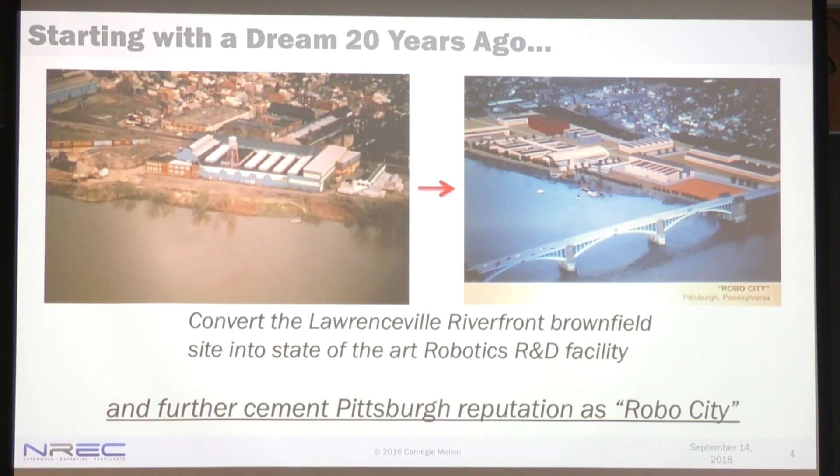So we built the building - that's what it looked like back then. We tore down most of the shell and kept the structure, basically. Now it's a very nice facility.

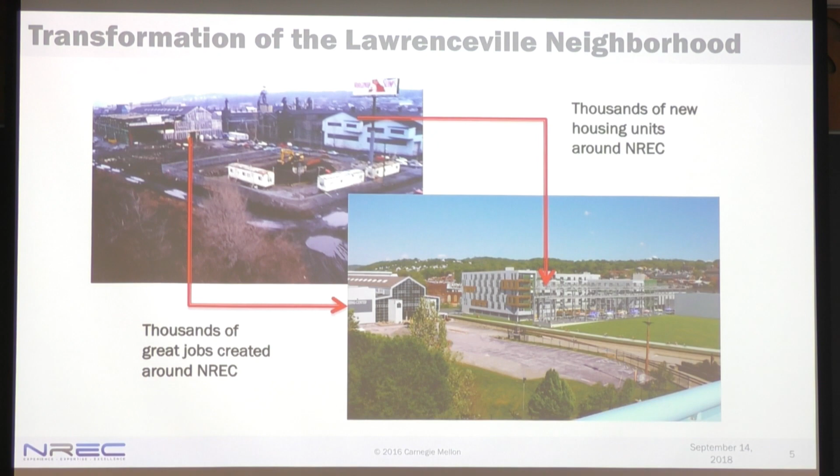One thing we are proud of - we're not saying this all happened because of us only, but certainly we played a critical role - Lawrenceville is now becoming one of the most desirable places to live in the whole city of Pittsburgh. There's a lot of nice property there, and part of this is because many high-tech companies started up around our facility. Once we were there, people started building other facilities, companies moved in, and as companies moved in there were a lot of great jobs. People needed a place to live, so they started building apartments and condos too. Now the whole neighborhood is transformed, and we are very happy to play a role in that.

Right now what is happening is what I like to call the robotics triangle. With NREC here on the north edge of the triangle, Carnegie Mellon on the southeast, and downtown on the southwest, there are so many different high-tech companies, not just robotics, including startups from CMU and other universities. There's a huge concentration here in this triangle, and we are happy to be part of this.

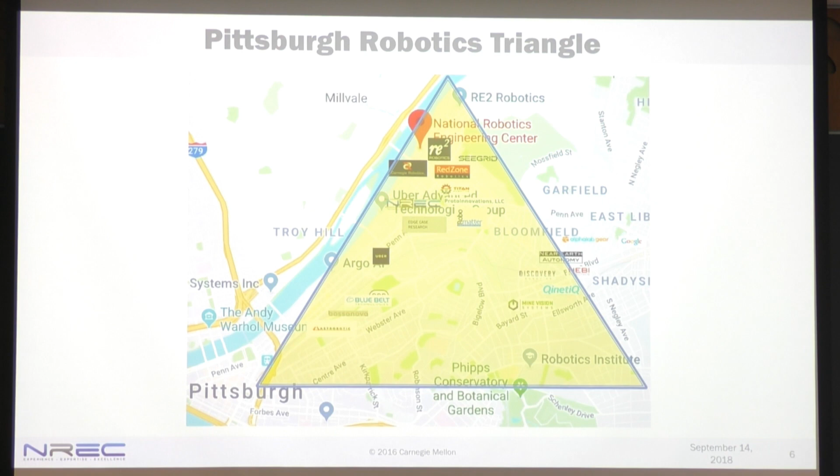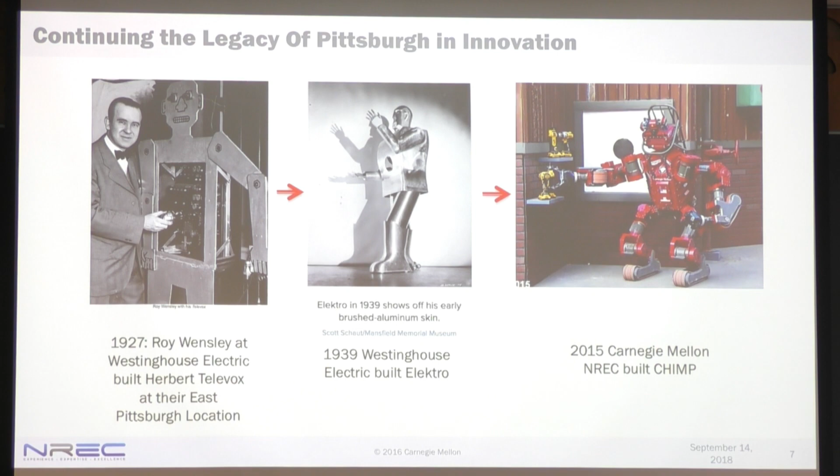If you look further back, a long, long time ago, there's a long history of robot development. One of the first robots developed in the Pittsburgh area was back in 1927. A guy named Roy Wensley at Westinghouse Electric built something that looked like a robot. It was actually just an automated phone answering machine. But given the limitations back then, relay, tube, it's amazing what it could do. It could answer the phone, understand very simple words just by frequency discrimination, and do some playback. So the history of doing robots in Pittsburgh goes a long way.

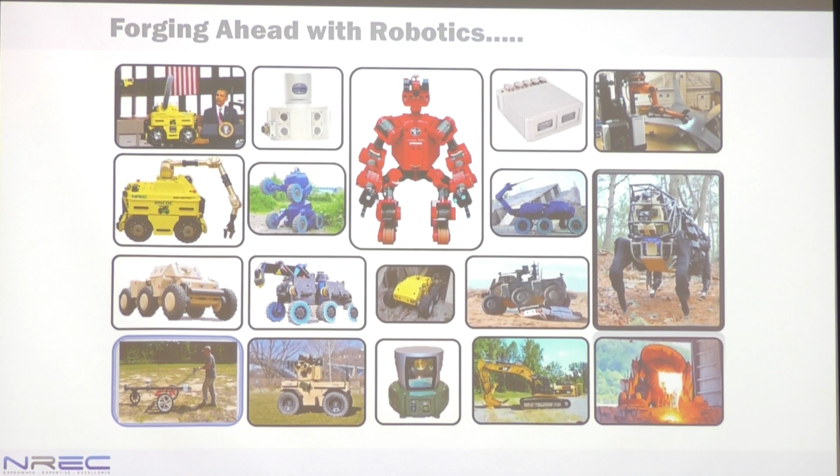Sometimes we supply technology to other companies. You're probably familiar with Big Dog from Boston Dynamics, on the right side. For that, we supply all the sensing technology and perception technology to allow that robot to walk autonomously. I'll show a quick video here just showing what we built.

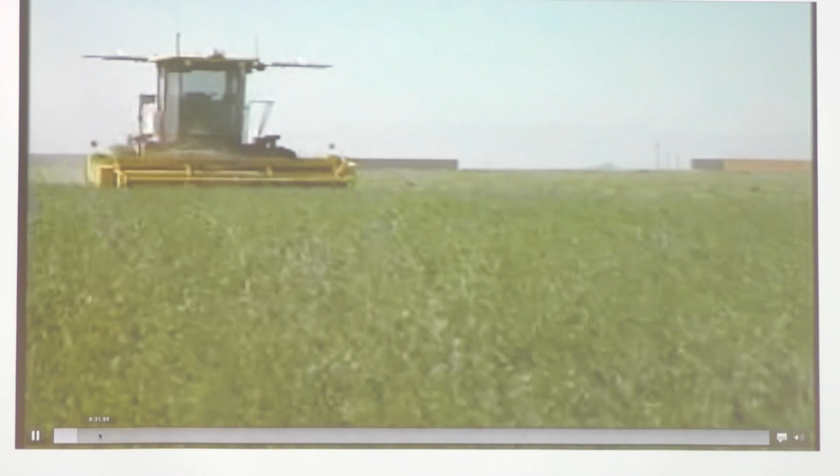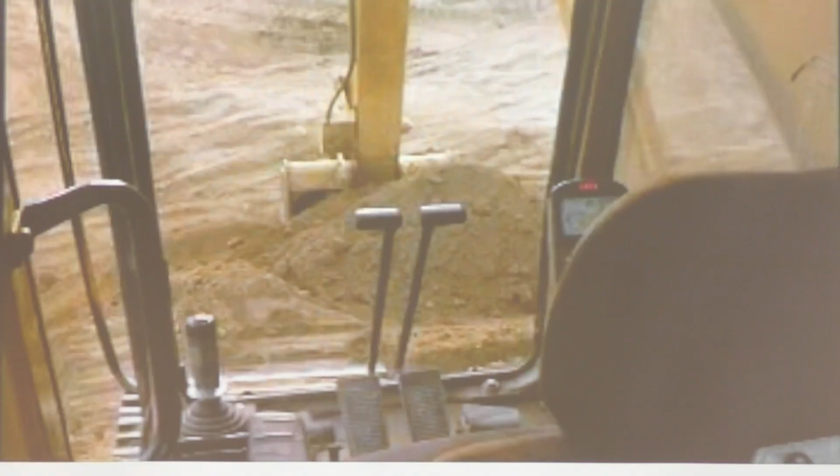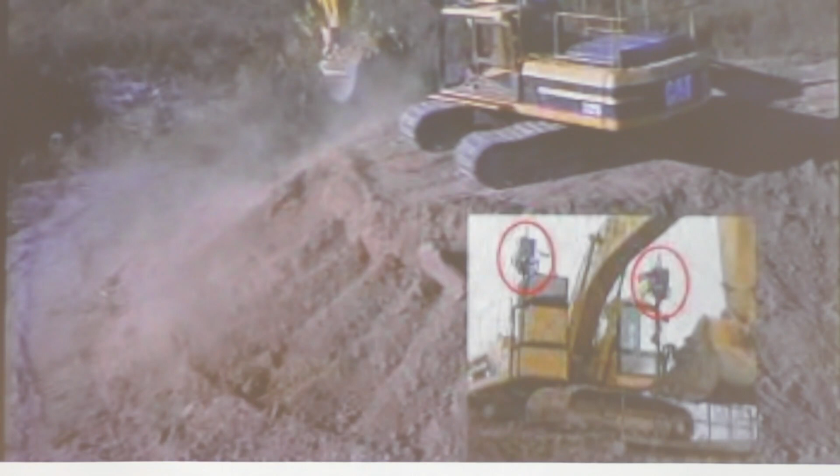We have activity in autonomous farm equipment. This is one of the early machines we built. This is a project that Sanjeev and I worked on together, a fully autonomous excavator for Caterpillar. One of the interesting points is, by the end of this project, it was a successful project from a technical standpoint, but back then it was so expensive to replicate. It just doesn't make commercial sense. Technically interesting, but back then it's just so expensive. We ended up having to design our own semi-custom laser scanner, millimeter wave radar, and all those things. This is actually one of the first projects run at NREC.

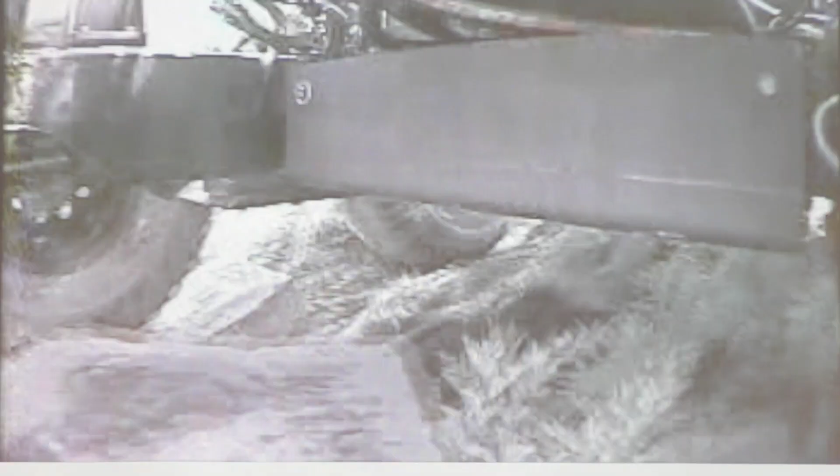That is one of the early prototypes for Crusher, the 6-wheel vehicle, with the autonomous helicopter flying off it to do mapping in front of it.

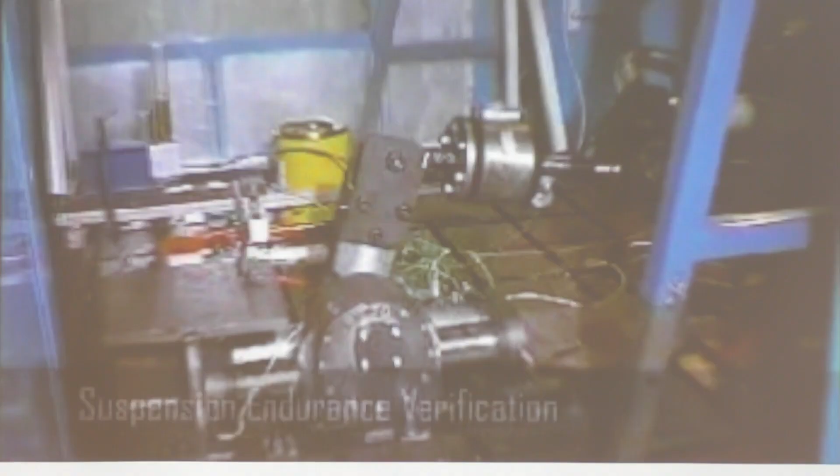One thing that differentiates us, since we tend to build mature stuff, we spend a lot of effort on testing. A lot of effort testing. I'll say more about that. This is just a time-lapse video to show the building. This is a gas pipe inspection robot that is licensed by a gas company to do live inspection on live gas pipe.

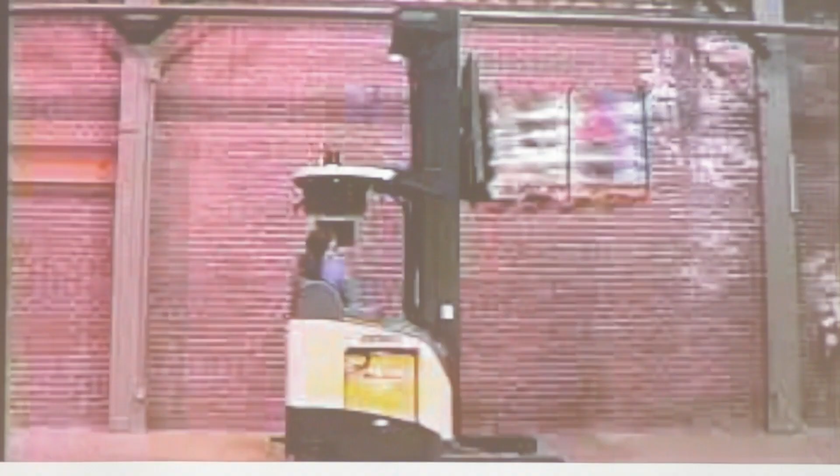So that's an autonomous forklift assist system there. You could see, even back then, all these videos, some of them are 15, 17, 18 years old. Even back then, from a technical perspective, many things could be done. They're just too expensive to be deployed as a product. And that is one of the big changes here in the past couple of years. Suddenly, the cost of doing all these things is much, much lower.

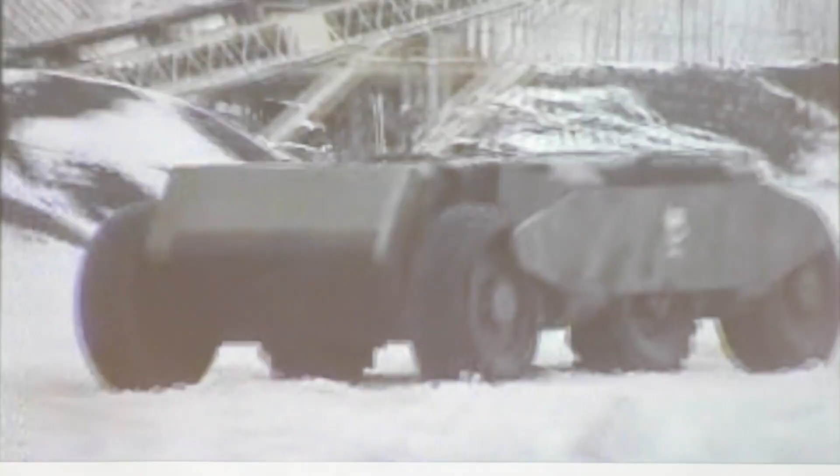This is another 6-wheel vehicle we designed for the Marines. That is Crusher. This can drive by itself. This video doesn't show the sensor, but there's a version of this that also drives by itself pretty well.

One thing is, when you're testing a robot like this, it's pretty fun actually, to see all these things. You can destroy cars, you can run over cars, you can do all crazy stuff. So that's how it gets its name.

Not only that, when we test this thing, we have the farmer themselves operate the tractor. It's one thing to build something that an engineer can operate. It's another thing to build something that non-technical people can operate. Much, much harder.

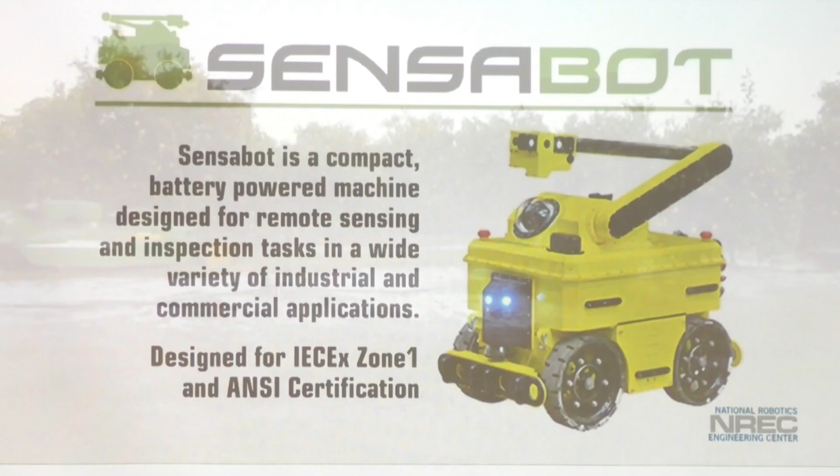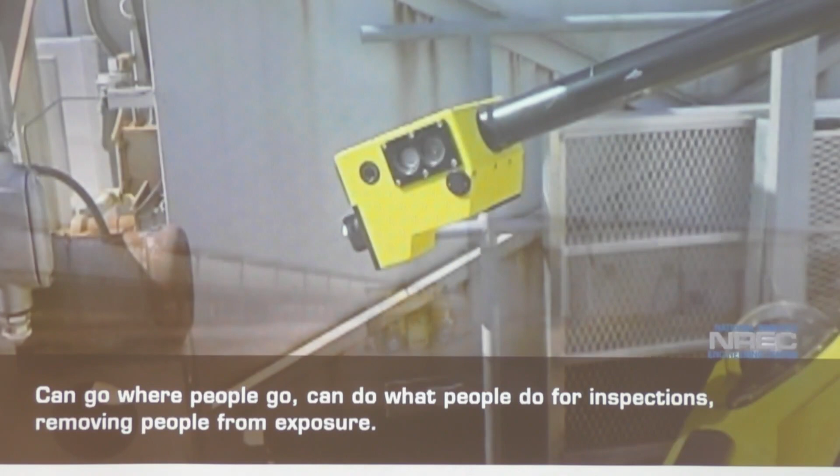That's the yellow robot that we built for Shell Oil. Basically, it would go around and do inspection and gas detection, especially hydrogen sulfide. One whiff of that, if there's a leakage, is enough to kill somebody. In fact, in Houston, a leak just killed 2 people. You cannot smell it, and by the time you notice it, it's too late. I will show more of this video later on.

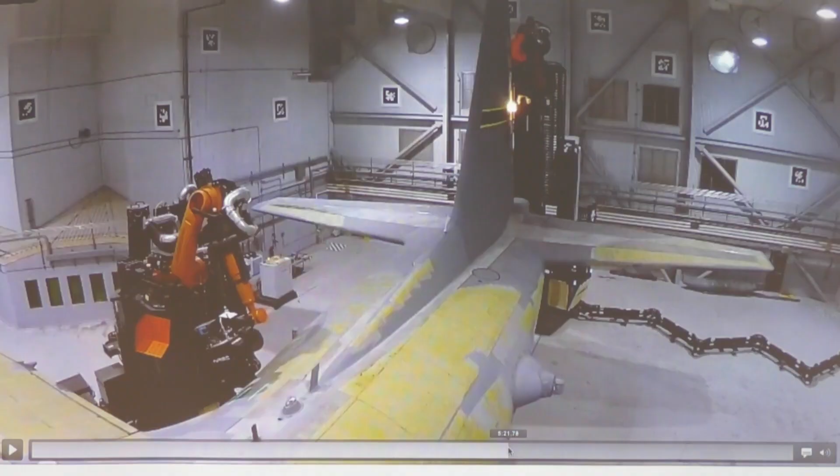Let me fast forward. This is also another interesting thing. When you're testing robots, there are many, many incidents. That's what makes it interesting. We damage a lot of stuff.

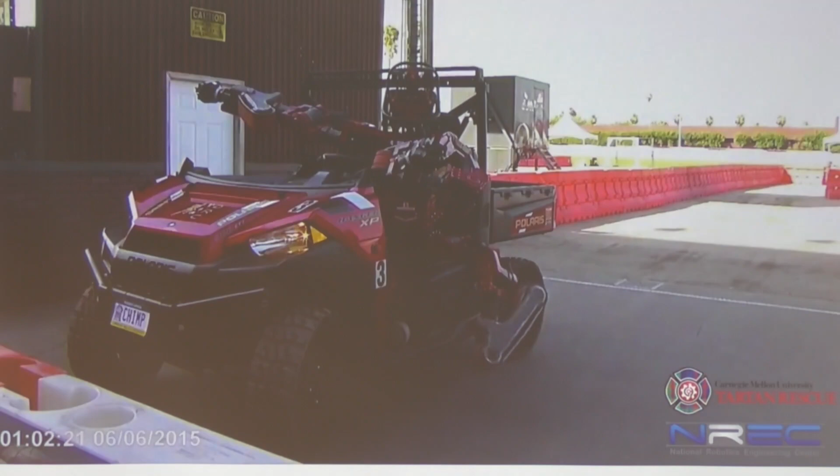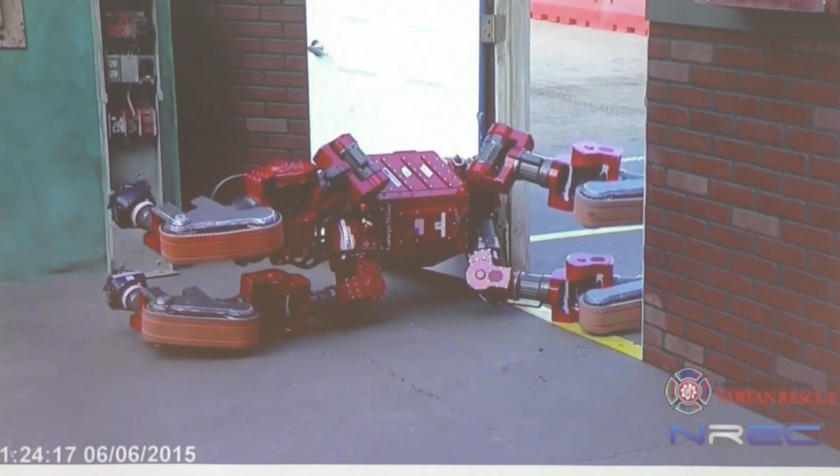Then again, later, about 2 years ago, that is our entry. You guys might have seen some of this video. That's Chimp. The distinction for Chimp is we didn't get first place in this competition, but Chimp is the only robot that can recover after it fell down by itself.

So right now, what we're doing with Chimp is, the robot itself is too complex for commercial application. So instead, there's many technology incorporated in Chimp that we are applying to other products we are developing for a few companies - the manipulator technology, the sensing technology. So we have a couple of programs right now that basically take technology developed for Chimp and apply it to this new set of applications.

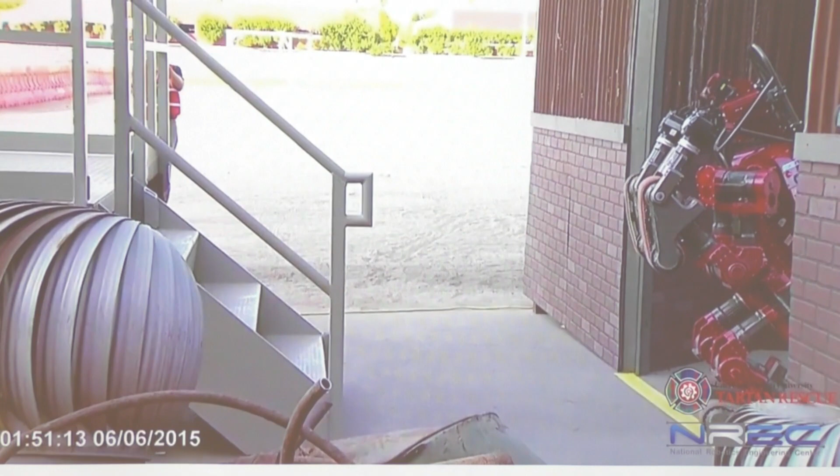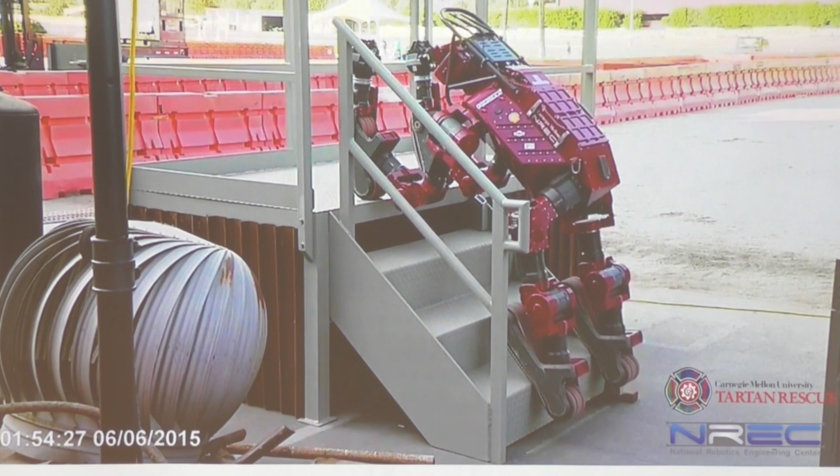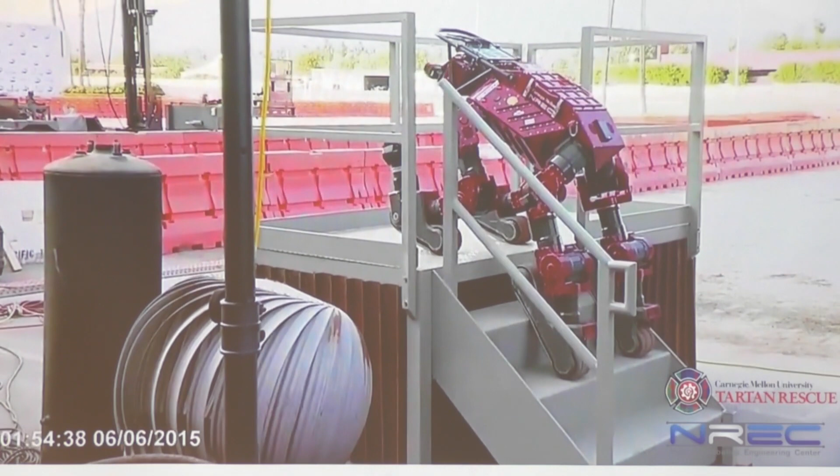So that's a unique way - that's the safest way for us to have Chimp go up the stairs. That was the biggest relief when it actually got up there and finished the competition.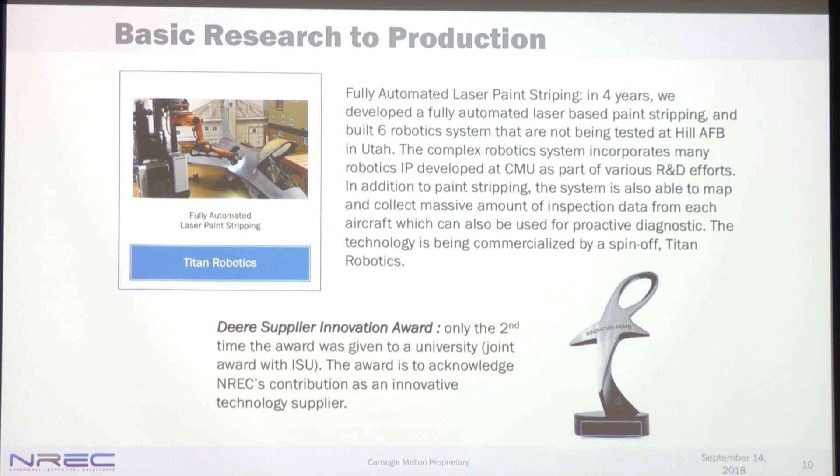So for this robot, I'm going to use it as an example of what you can do in robotics right now. This is a very complex robotic system, an aircraft coating removal system. The Air Force has been trying to solve this problem for 20 years. They worked with a few companies before working with us, and they didn't get what they wanted.

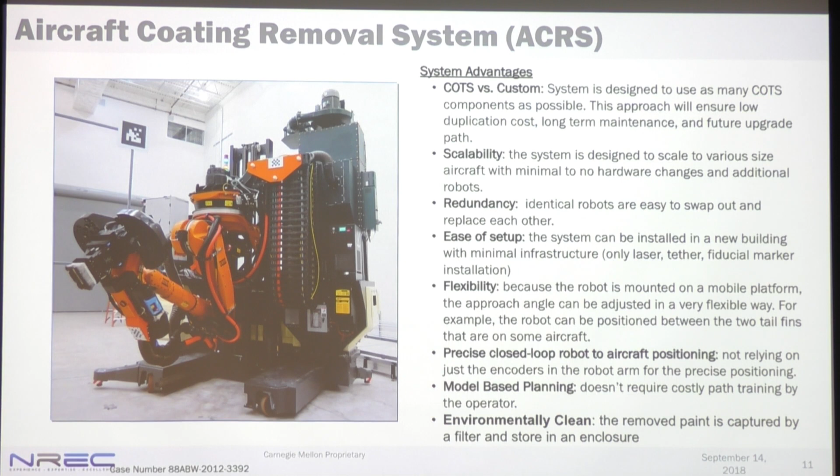Basically what they want to do is, they have about 3,000 aircraft in their inventory. Every 3-4 years, they need to be stripped of paint and repainted, otherwise they will rust and have damages. So they want a fully automated system to do this, because otherwise, for one aircraft, it might take them 2 weeks to strip the paint off.

So we started this with a very small project, just 150K. They said, hey, can you solve this thing? So we had a very small project, we developed a concept, they looked at the concept - it looked great. Why don't you guys build it? So we built the first unit one year later, and it worked pretty well.

I will show you the picture. We even have a full F-16 in our building. Our building is big enough, so we remove the wing, bring in the airplane inside, assemble the wing, and use it for development.

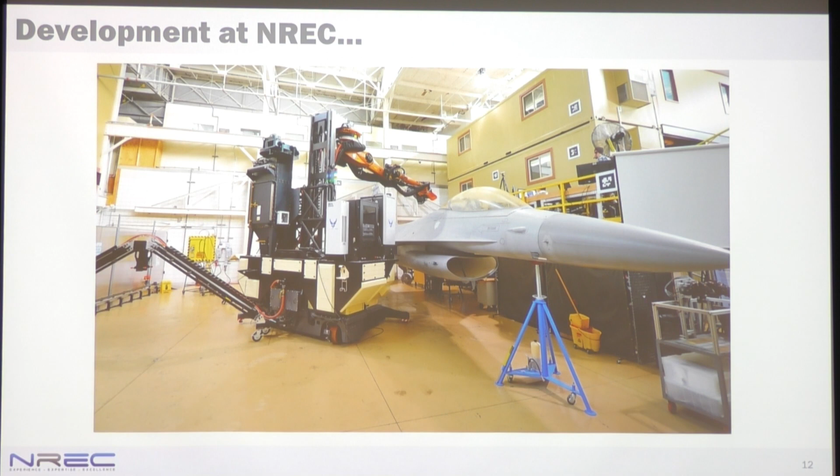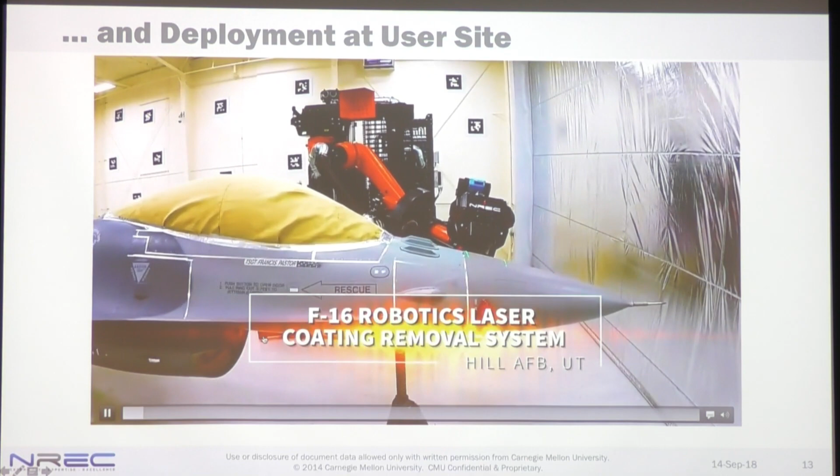This is inside our building. That is the first prototype of the robotic system. It worked well, and they said, why don't you guys build a fleet of these things? So we ended up building 6 of these, all installed at an Air Force Base in Utah, Salt Lake City. You can see this robot working on actual production.

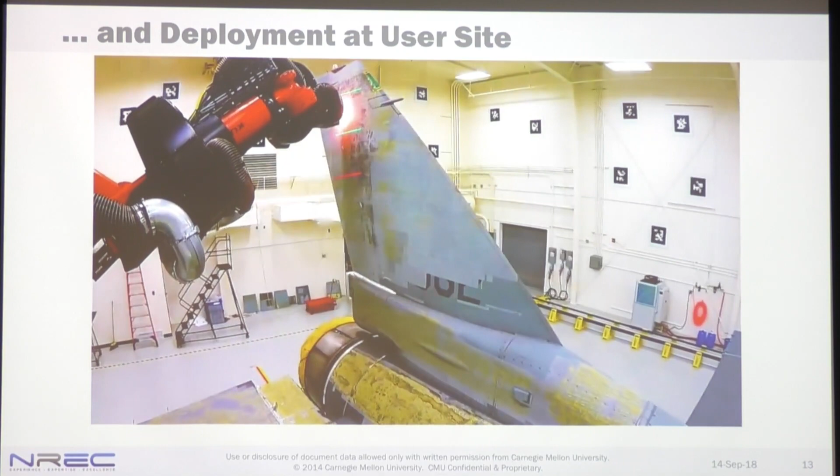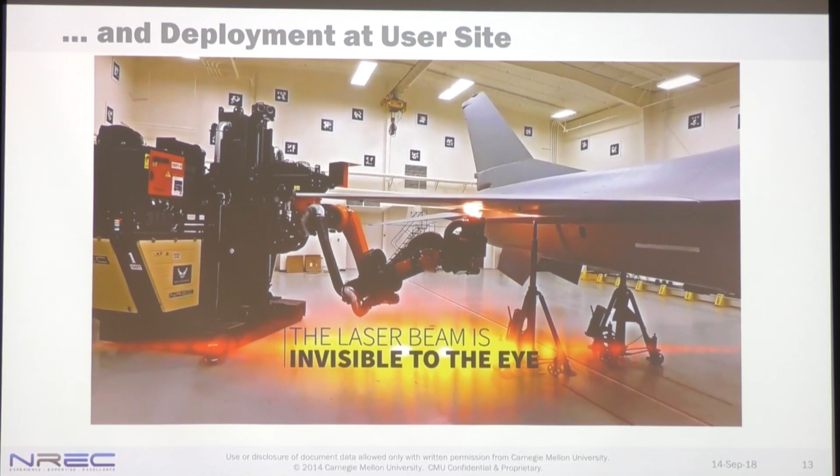Air Force aircraft. The scary thing about this is if the robot makes a mistake, that aircraft costs about $40-50 million. So you just ruin a $40-50 million aircraft. The laser, if you linger for half a second too long, will basically drill a hole through the whole aircraft. That's why there's a triple safety redundant system there.

This is one of the most complex projects that I led. It's very satisfying because it ended very successfully. In addition to stripping the airplane, it also built a very accurate as-built model of the aircraft. This is one of the keys to making the system work.

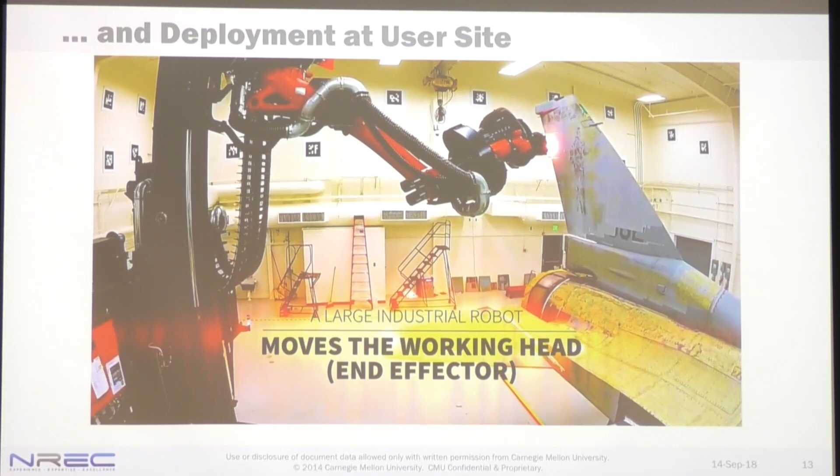All the previous efforts, all the other companies that tried to solve this, used the CAD model from the manufacturer, which turns out to be completely different from the actual shape of the aircraft. So you take 2 aircraft, they are not the same. Instead of that, we map it in 3D and use that real-time data to control the arm and do it pretty accurately.

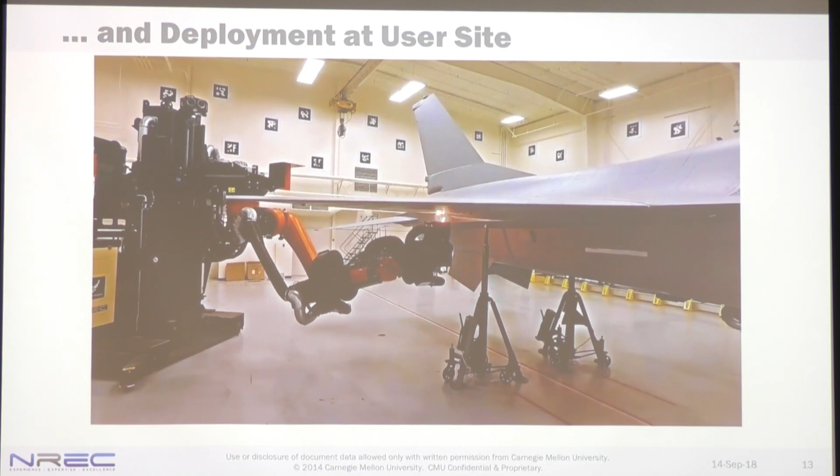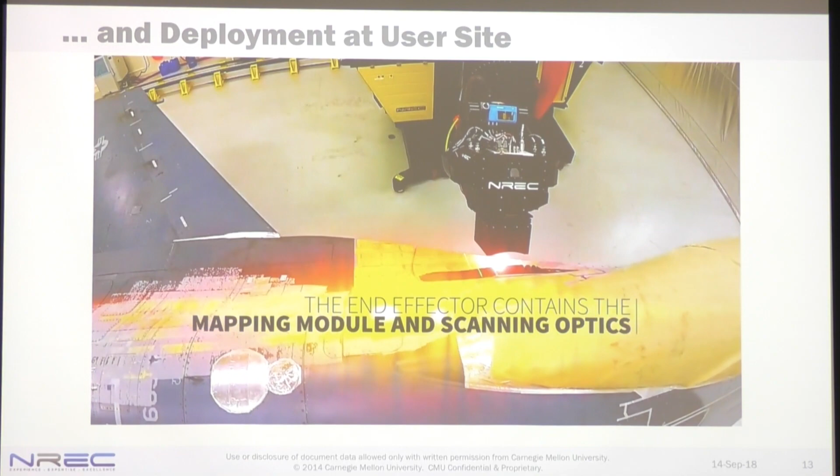At the end of this project, the Air Force wanted more support. We also wanted to see if we could deploy this for commercial aircraft like the Boeing 737 or Airbus 320. So we spun off a company, Titan Robotics, which is doing pretty good right now, trying to push this technology out there.

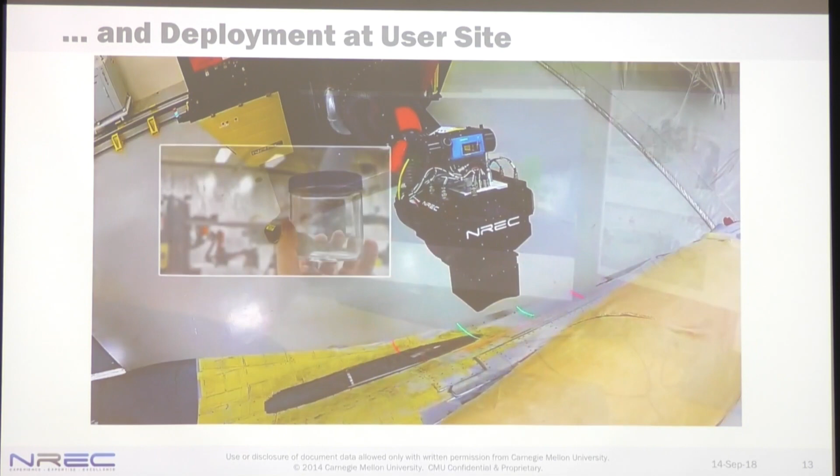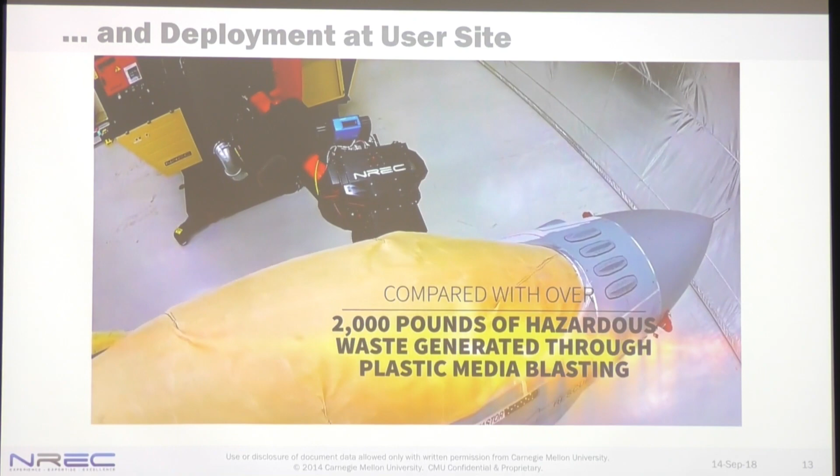Another benefit that might not be obvious is, if you look at the room, it's very clean - there's no debris, no paint debris or anything. Because there's a suction mechanism, a vacuum mechanism that sucks up all the debris and paint removed by the laser, and there's a HEPA filter on the other side that filters that. So at the end of the process, you get a box, a container of dry paint. It's a very, very clean process.

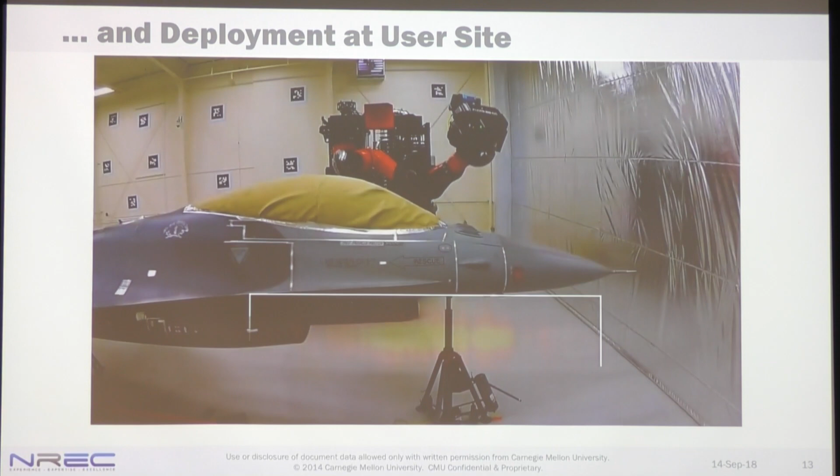Hopefully that gives you some context about what we do, the type of equipment we develop. Developing all these different systems, working with different companies, some startups, some big companies, we do learn a few things. Hopefully these lessons are useful for anyone developing new systems or starting a company.

For many systems we built, we start with the project, and the obvious one is the hard problem. But one thing people keep underestimating is they usually neglect the simple things needed to make the whole system work, in addition to that one hard problem. That can occupy 50-80% of the effort. But people don't think about it because they say it's straightforward - like calibration. Calibration isn't technically difficult, but it takes time to do well. If you don't pay attention to that, you won't have a good product. So it's critical to differentiate: don't confuse something that's technically simple with something requiring small effort. Something could be simple but still require a lot of effort.

Another thing people ask us is why the robots we build tend to be reliable, especially the production prototypes. I think one of our secrets is we have good technicians, machinists, and fabricators. Do not underestimate the value of quality work - when you're putting in cables, putting in stuff, it's not as sexy as engineering work, but they are equally important, if not more important.

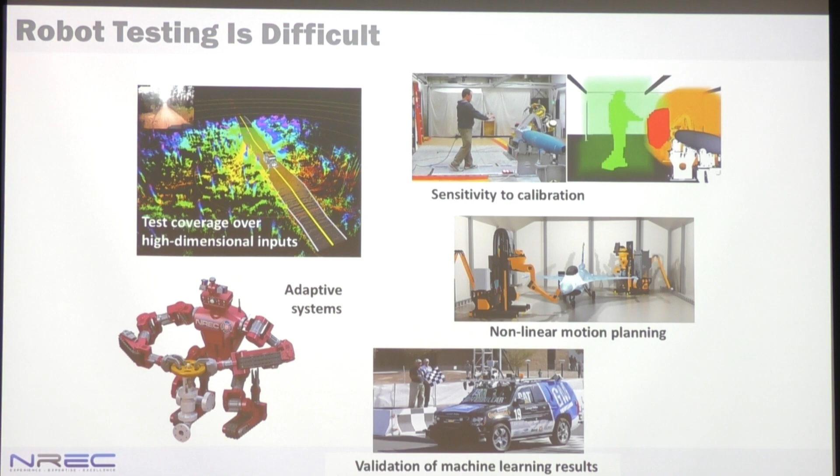If you use machine learning, as you guys know, it's somewhat non-deterministic with regard to the stimulus, because if there's something new, you're not 100% sure how it will react. That makes it also challenging. In the end, it's just challenging because it's an adaptive system - the robot reacts to the environment, and as we know, the environment we all live in is very, very extremely complex.

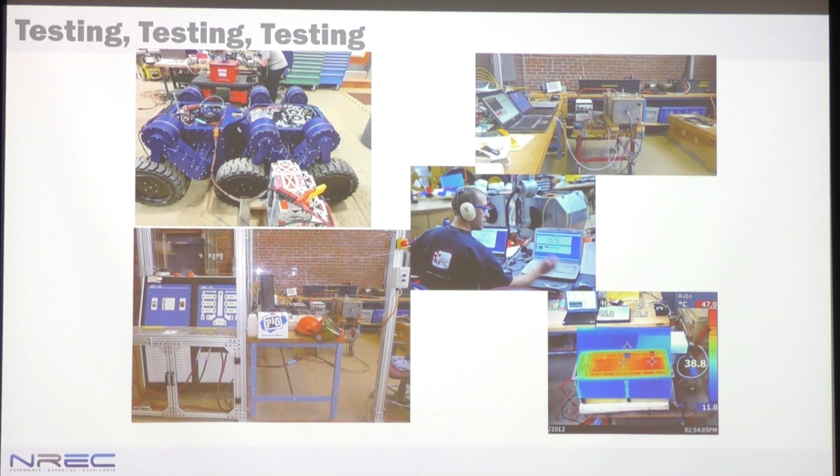So because of that, if you guys want to build a reliable robot, just don't undercut or underestimate the need for testing. Testing is directly correlated to how well that robot will behave. Okay, a few other observations.

It's critical when we design a robot to get that prototype out there on the customer side. Many times a company, a client, would come to us and say, can you design a robot to solve this problem? We'd ask, what is the problem? The problem is A, B, and C. So we build the robot to do A, B, and C, and we get the robot out to that site, only to find out the problem is not A, B, and C - those things are easy, actually. The problem is D, E, and F. Many times people don't even know the right problem to actually solve, and you don't find that out until you actually get the machine, the robot, out there.

A good example of that is the right user interface. If you don't have the right user interface, you can build the nicest robot you ever built, and everybody will hate that robot.

Now on the other hand, when you start deploying multiple units - sometimes when we build prototypes, we have a dozen or two dozen of those machines out there - if you do this too early, then you also have a problem. Because let's say you build 100 robots with 99% uptime, so it can operate with 99% reliability. If you have 100 prototypes, that means on average one of them is not working at any time. So if you do that too early and the prototype is not mature yet, what you end up doing is occupying your whole development team handling those issues in the field. You get that phone call at night, you get that phone call on the weekend saying something is not working, something is not working, and basically you just kill your developers.

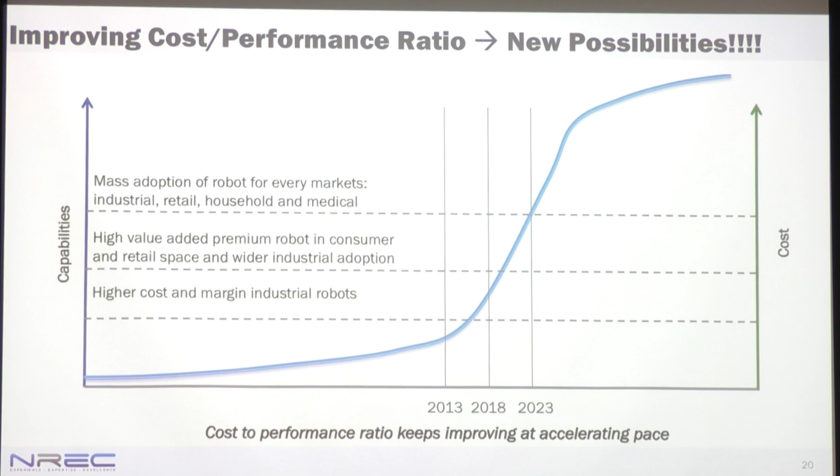So what happened is, if before we could only address the high-cost, high-margin industrial robot market, now we can start addressing the high-value-added premium robot market. For example, you can buy a $1,000 robot to vacuum your house - very expensive, right? But many companies build that, iRobot and others. And as you ride the curve even higher, at some point, which I think isn't that many years away, you'll start seeing mass adoption of robots in every market: industrial, retail, household, and medical.

And the thing that makes this all possible is that at the same time, the cost curve is going down. It's a positive feedback loop: you find more applications, it increases the supply base, so the component is produced at higher quantity, which drives the price of the component and the robot down. As you do that, it opens a whole new market, new applications, new robots, which in turn increases the quantity, and you get that positive feedback loop. That's what we've been seeing - the cost of components keeps going down, capability keeps going up, and that's what makes it interesting.

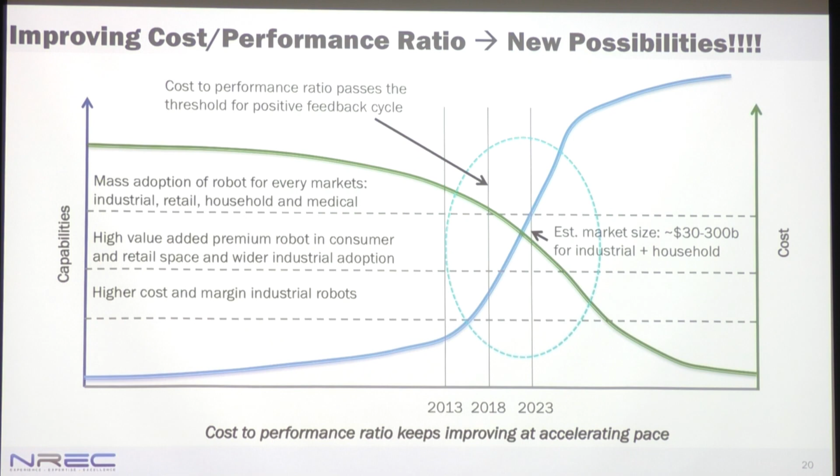Because of this, one trend I think will happen faster and faster is the whole robotics industry moving away from being vertically integrated to being more horizontally arranged. Right now, if you look at a robotics company, they tend to do everything - build the robot, build the mapping software, build the positioning software, build the user interface. That's a sign of an early phase of the industry. As the industry matures, you'll see a set of companies out there that will provide just a mapping solution.

So if you want to build a robot to clean this room, you might build the scrubber, but your mapping solution you just buy from a supplier. Same thing for user interface, same thing for machine learning. This is a sign of a maturing industry, and I think we're seeing the early phase of that. There's probably a lot of business opportunity in that aspect. There's not enough supply chain in this whole robotics ecosystem that needs to be there. It's just not scalable for every company to build their whole vertical stack.

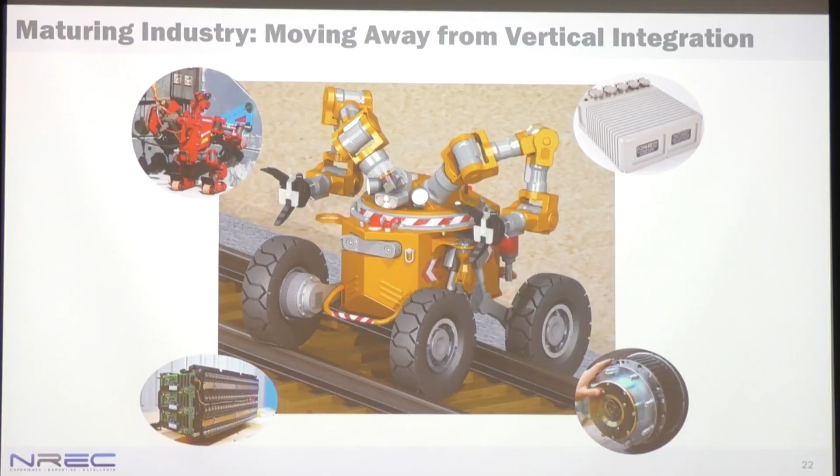Now on that note, just a couple of comments on self-driving cars, which is certainly one aspect of robotics that is maturing pretty quickly. There are still some serious challenges left, but I'm optimistic they will be solved. I think in general people feel they will be solved. One interesting thing is a lot of money is being put in right now, billions and tens of billions probably. But probably like anything in automotive, once the capability is there, it will be commoditized quickly by all the tier one suppliers. Most car companies don't develop technology themselves, right? They buy cameras from Bosch, radar from Continental, ultrasonic sensors from Valeo, and maybe CPUs from NVIDIA. So one thing we might see is as soon as the capability is proven, the cost will go down, hopefully pretty quickly.

One interesting thing is this is one of the perennial philosophical discussion topics. Car manufacturers differentiate themselves with safety features. So if you buy a car, they might say, hey, we guarantee however we make a decision, the computer makes a decision, we keep you safe. We'll crash into a pedestrian before we crash into a tree. And another car manufacturer says, no, we're not going to do that. It's interesting which car you want to buy, right? You might be rewarding the bad actor, the car manufacturer that biases that safety setting for the occupant, the driver. And there are other pros and cons.

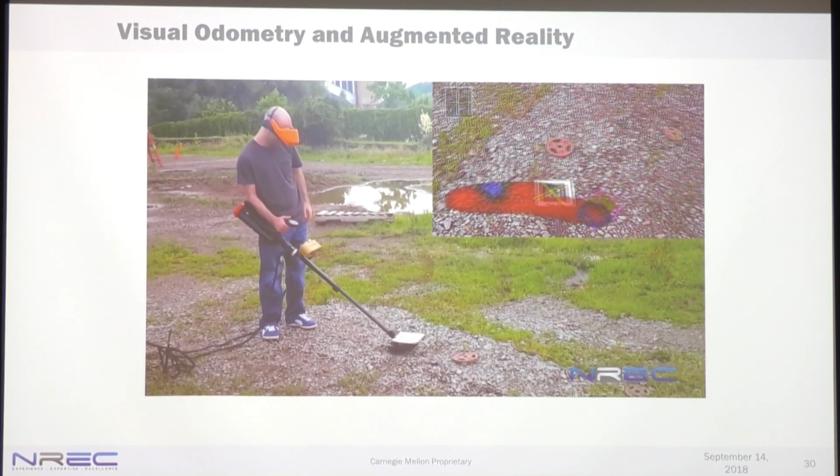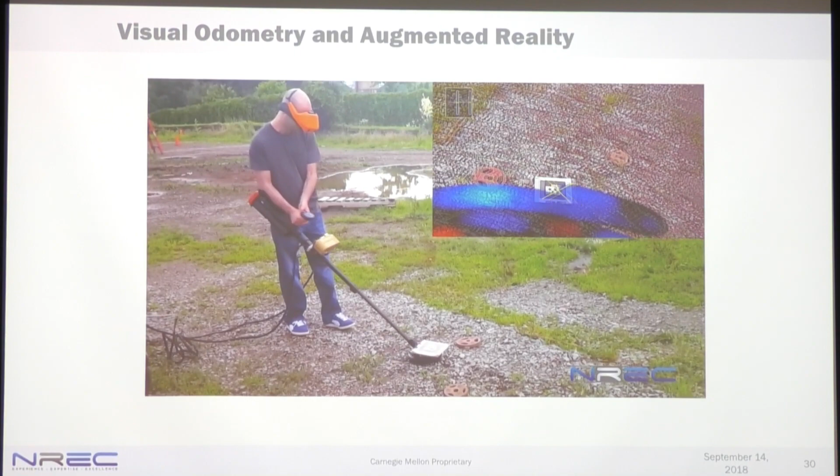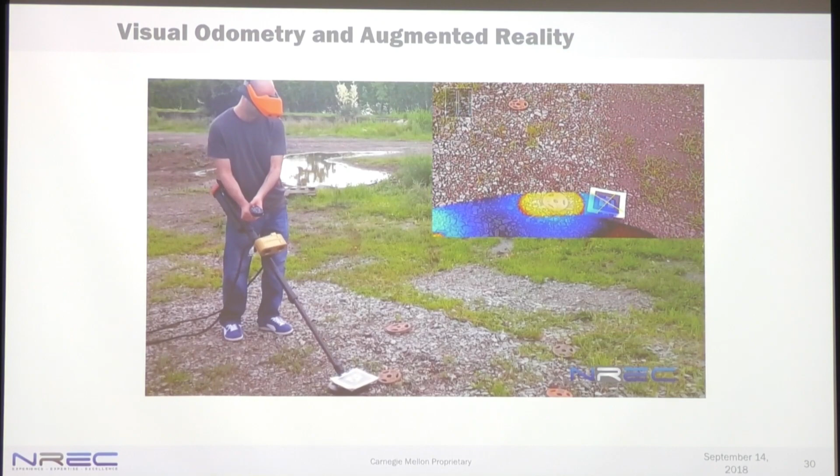Another example is this video of an augmented reality system we're developing for the Army. The Army would like to have an X-ray goggle basically for their soldiers, so they can wear this goggle and see explosive landmines buried under the ground. What we do is take a radar detector and map the output into an augmented reality goggle so they can see that thing. Usually that round thing is buried, we just put it on the ground so you can see it. So they really love this thing, and we are developing the 3rd generation of this.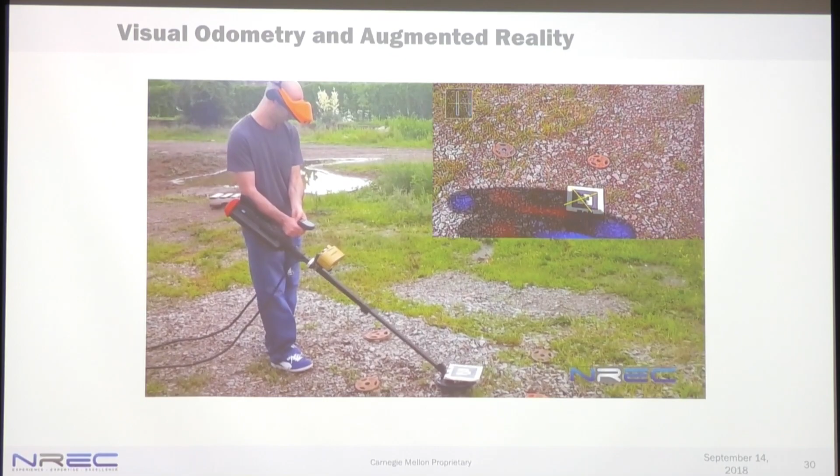But you could imagine what the future looks like. You live in Pittsburgh, the weather tends to be cloudy. Once the augmented reality goggle is good enough, you can press a button and it becomes sunny. If your wife or your husband gets tired looking at you, they can press a button and now you become like Brad Pitt, with one button. It's actually not that far away, with face tracking, and the Brad Pitt face could be animated as you talk. It's all there.

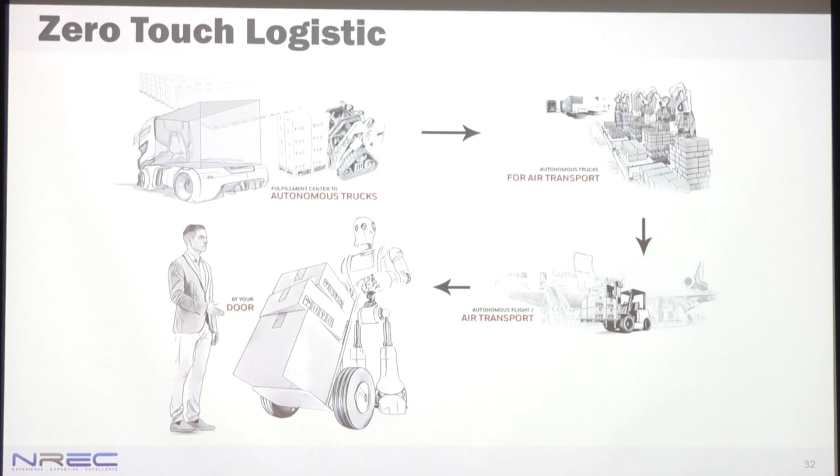Then there's logistics. Everybody here probably has an Amazon account. Right now, by the time you click order on the Amazon web page until your order shows up at your door, many humans are involved in handling the packages. I think the technology is quickly enabling what I call zero human touch logistics. Basically, from the point you click order, that order is fulfilled in the warehouse, put in the truck, put in the airplane, unloaded, and carried to your door, involving zero human touch. I think this is of course what everybody wants to happen, and it will actually happen probably quicker than we think.

So anyway, my message is this is an interesting time.

We are in a period where many things are possible. I encourage you guys to dream big, not only for obvious applications like self-driving cars. I encourage everybody to dream big and apply this technology for something that might be more beneficial for humankind. There are many things that could be automated that might benefit the environment, for example. We need to be imaginative about that. It's time to dream big.

We built robots, but we still need people. So any of you who might be interested in getting into robotics, or know somebody, whether in the US or outside the US, who wants to go into robotics as a good engineer, please contact us.